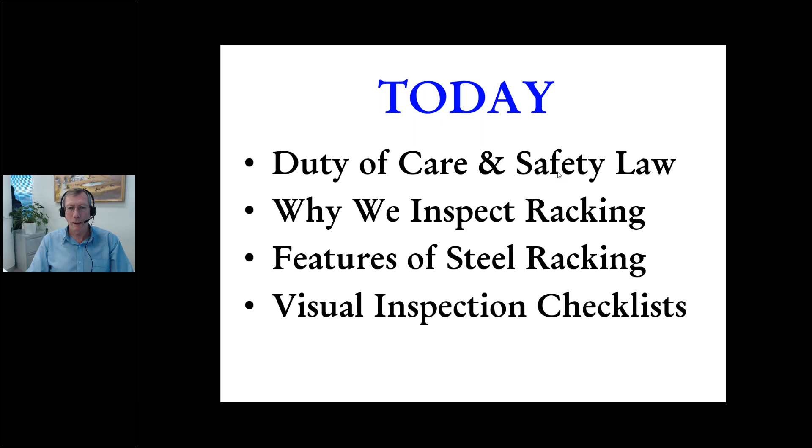So let's look at the general duty of care. If you work in the safety area, you'd all be very familiar with the 4 key points of the employer's general duty of care: 1, to provide a safe workplace; safe tools and equipment; safe systems of work; and that workers are trained and supervised. So where does safe racking fit into this? Primarily number 2, that there are safe tools and equipment. So part of the equipment and plant in the workplace includes the racking that you have.

If there's a problem with the racking, for example, if items were to fall off the racking or the racking were to collapse, that might affect number 1, and therefore it's not a safe workplace. We need a system of work for inspections, that's part 3. And we need to train people so they can actually do these rack inspections effectively and efficiently. So I'm going to take you through these parts.

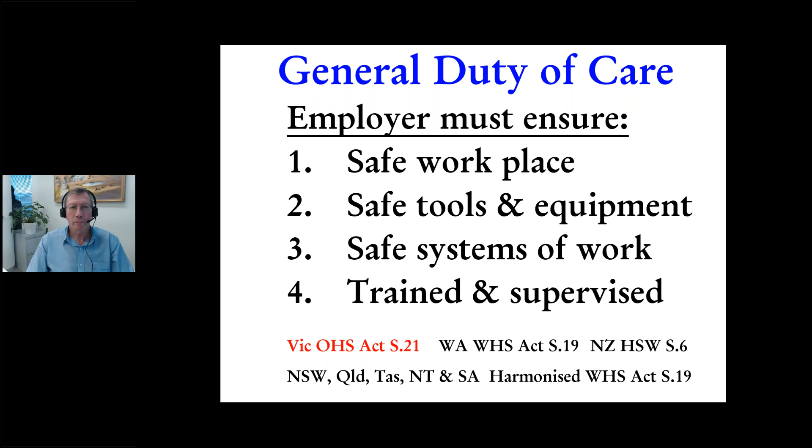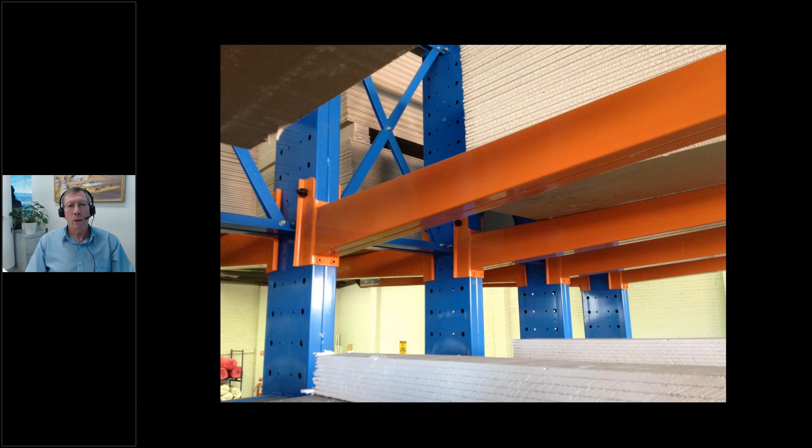So why do we need to inspect racking? Let's just have a look at some recent incidents and issues with racking. If you look a little bit closer at this scene, you're looking at some new cantilever racking that's only just been installed at one of our clients. And by first appearance, this looks high quality, very new, very good condition. But as we zoom in with the camera, you might observe something that's not quite right. And you might just see a hairline crack. I've now got the arrow showing you the crack that's appeared here.

And if we look even closer, you can see that that crack has extended up and over the top of that cantilever arm. What we found in this particular case is that multiple arms out of the same batch were affected. So our client had received a faulty batch of brand new racking. So there's an interesting point here that you can't assume just because you've got new racking that it will be safe and free of faults.

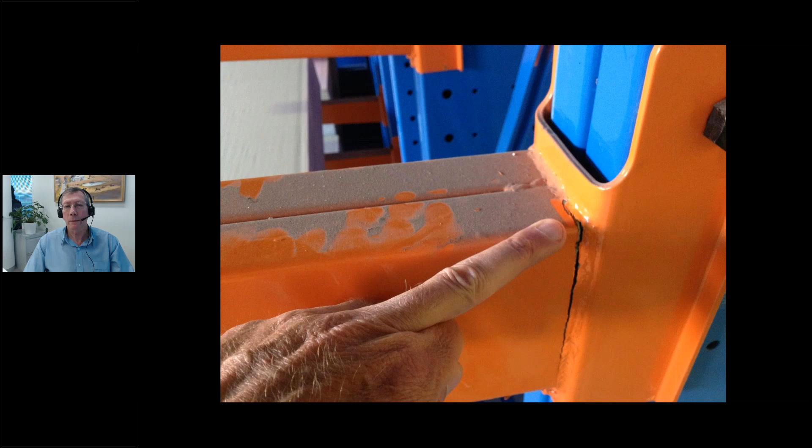Clearly the manufacturer was advised of this. We determined that the welds were not full depth. This was a manufacturing fault. So the steel itself was satisfactory metallurgically, but the welding technique was substandard for this particular batch. And the client received a totally new batch of racking, which in fact met the correct standard. So just something interesting to watch.

What you're looking at now is a collapse from some years ago now. This is the compound area of a manufacturing business in Port Melbourne, back in 2010. And this is the aftermath of a collapse of a section of racking. And you'll notice there's not much storage actually in this section of racking at the moment. But the first thing to understand is that it collapsed with essentially only one pallet load on the rack section that collapsed. So in fact, the racking was not fully loaded, and I'll explain the reasons why this occurs shortly.

Here are some details of the carnage from this particular rack collapse, and you can see how extensive the damage to the steel columns and beams was in this case. And we were very fortunate with the company involved that no one was in the immediate area. The forklift driver was within the safety cage of the forklift and didn't sustain any injury. So this was a very fortunate learning experience. So let's continue the learning experience to actually understand a little bit more of what happened here.

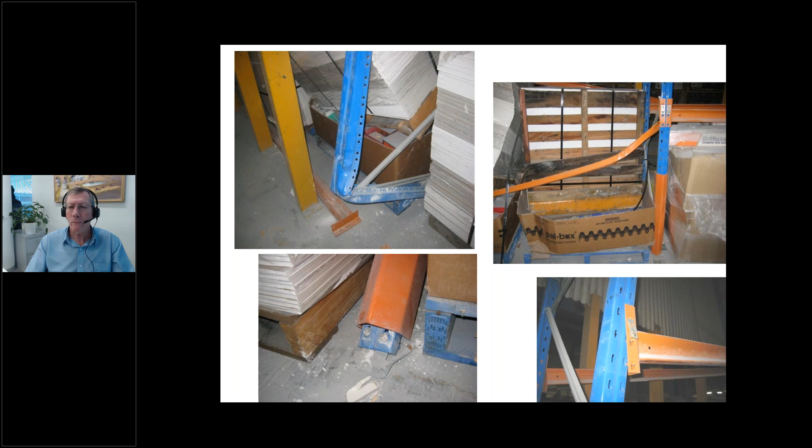Interestingly, this is one of the few cases in my work experience and long experience as a safety engineer where we've been able to look at the photographs both before the collapse and after the collapse. So here we are on the 11th of August, 5 days before the collapse, and you'll notice the arrow on the left pointing to a slight bow in the vertical column. The blue vertical column there is only just slightly bowed. If I didn't have that arrow there, you might not have noticed it.

The photograph on the right shows a slight flattening of that blue vertical column in the middle. So it had been bumped probably by a forklift placing a load into the racks sometime previously. And the reason the racks in this area are empty is because that bow and damage to the rack was correctly observed by the local team, and correctly they followed the procedure to unload the racks on each side of any damaged section. So this is the correct practice in good best practice racking and logistics businesses. So they've followed the correct procedure here.

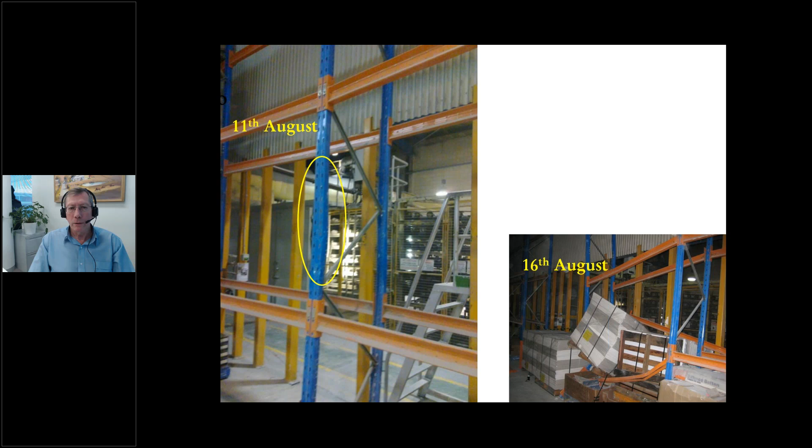So here's the scene on the left on the 11th of August, and here's the arrow showing going through 5 days later. So what actually happened? They unloaded the racking, as I explained to you, which was the correct process in this area. What they failed to do was to immediately tag out the racking so that anybody else coming onto shift or on a different day will not miss the damaged section of racking and start loading the racking up, which is exactly what happened 5 days later on a night shift.

So with poorer lighting at night, the forklift driver looking for somewhere to place a load came across an empty section of racking and thought he was very lucky. He's found some gaps in the racking that he can place his load, and he only placed one of those loads onto the rack to see the damage that you see here.

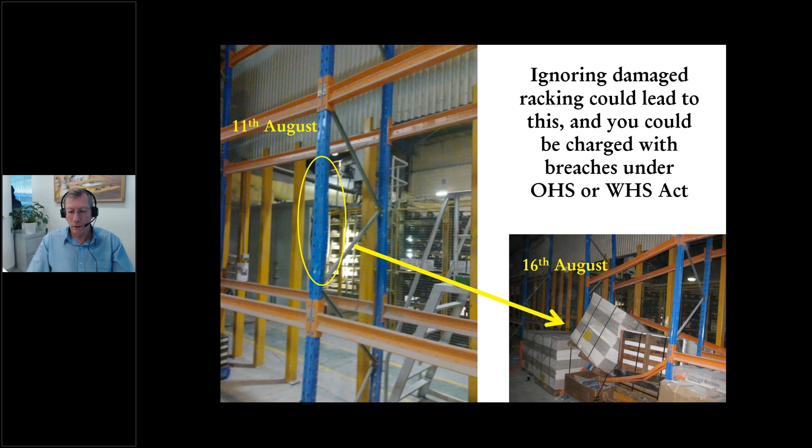So the lesson from this is not only do you need to do inspections, you need to be equipped, you need the danger signs, the danger tape, and possibly witches' hats to immediately tag any unsafe racking out of service immediately. And this needs to be an important part of your procedures. And we'll come back to the procedures shortly.

So I mentioned earlier, what are the features of thin-walled steel racking and why do they behave the way that they do? I'm going to carry out a demonstration for you here, and I'll pull back a little bit from the camera, and I want to use a 1 meter measure here, which is a typical spirit level that we might use on a construction site, and we often use these during inspections of racking as well. So you might want to go to one of the hardware stores and buy a 1 meter spirit level with a tape measure you'll see on one side of it. I'm using it for a different purpose here though. I want to just show you what is different about thin-walled steel racking.

So if I come back here, let's assume this is the vertical column, and now we have the beams coming out of each side of the steel columns. And let's say typically we have 2 pallet loads on each side of a beam that would normally be much longer. Let's assume each pallet load is a ton for simplicity. So if I have a ton here and a ton here, I now have another column out this side. So 1 ton carries over to this section of the column. And if I have another load of a ton here, that brings a ton load down to this section of the column.

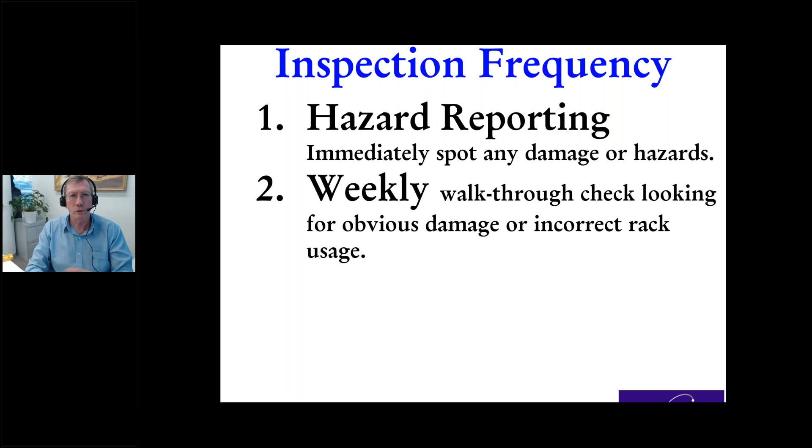Next level, I think a weekly walkthrough check, looking for obvious damage and incorrect rack usage. And I'll show you what incorrect rack usage is when we go through the checklist I'll share with you in a moment. On a monthly basis, we believe there should be a formal rack inspection using a checklist. And the people who use this checklist will also need some training along the lines of what we're covering today to be able to do this.

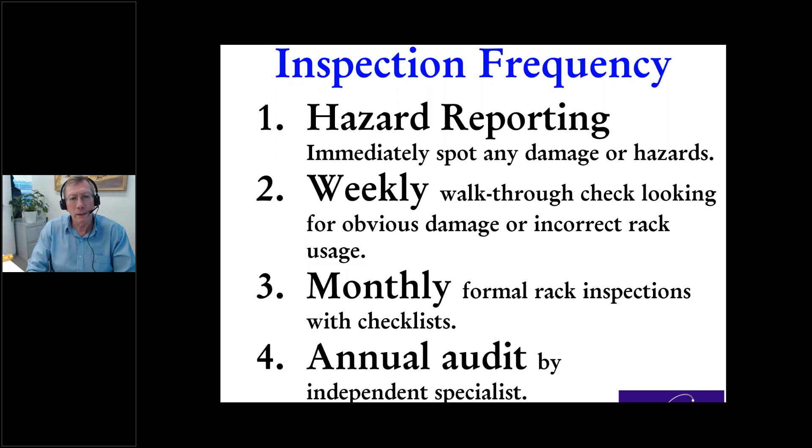And finally, there should be an annual audit by an independent specialist. This could be your rack supplier or a qualified engineer who comes and does an independent review on an annual basis to sign off, and that's in accordance with the Australian standard for steel racking that you'll have this annual audit.

So there's an example of a plaque where a firm has inspected the racking and indicating 1 year, 12 months, hence, it's due for its next independent inspection.

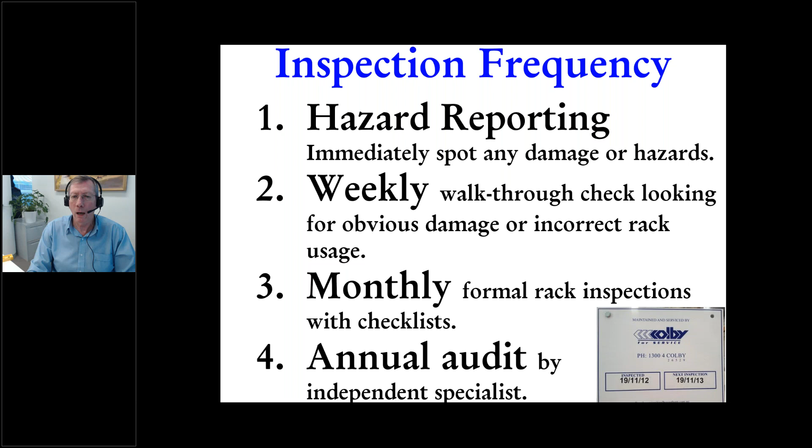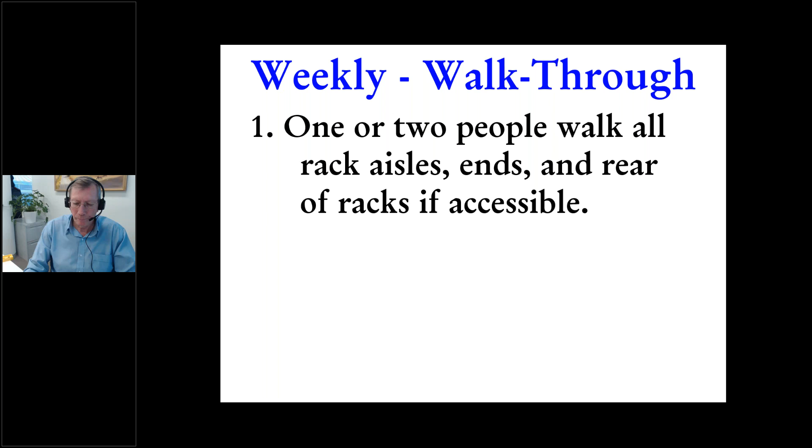So let's look at the weekly walkthrough. One or two people could walk down all of the rack aisles, look at each of the ends and the rear of the racks where they're accessible. What they're looking for is out of alignment. You can look down the line of the racking and it should all be perfectly in line, perfectly vertical, and the horizontal beams perfectly horizontal.

We're looking for obvious deformation or damage. So we don't need a ruler here, we don't need a spirit level. What we're looking for is what the eye can see. So this is the weekly walkthrough. It's a quicker, easier type of inspection. We're looking for missing safety clips, I'll show you a visual of what they look like shortly, and incorrect storage practices.

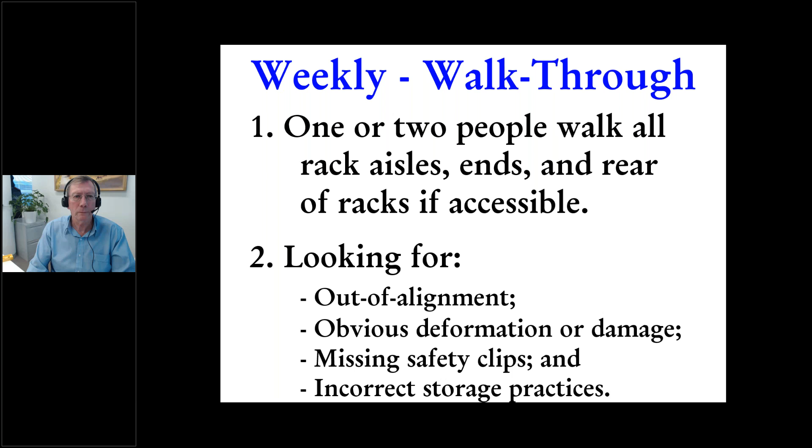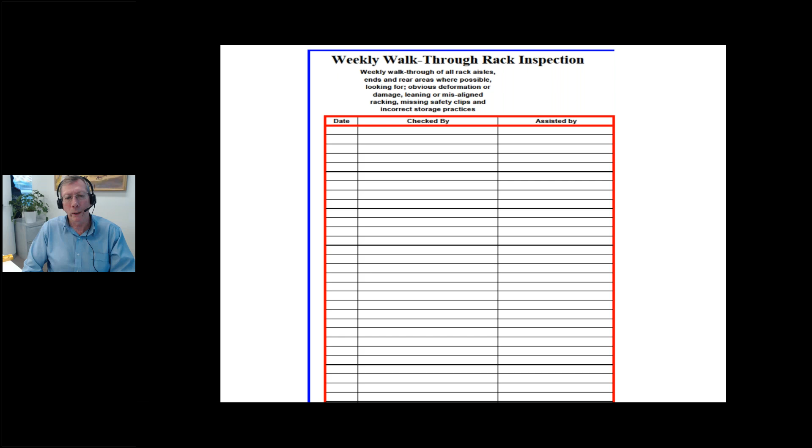So a sign-off could look something like the date that it was done, who was the individual or persons who did the walkthrough check, and if they were assisted by somebody. So you would only have one of these per week. So in fact, this sheet may cover many months of inspections to just show that we have a history of looking at our racking formally at least weekly, but in fact, it's a fairly quick check that we're doing here.

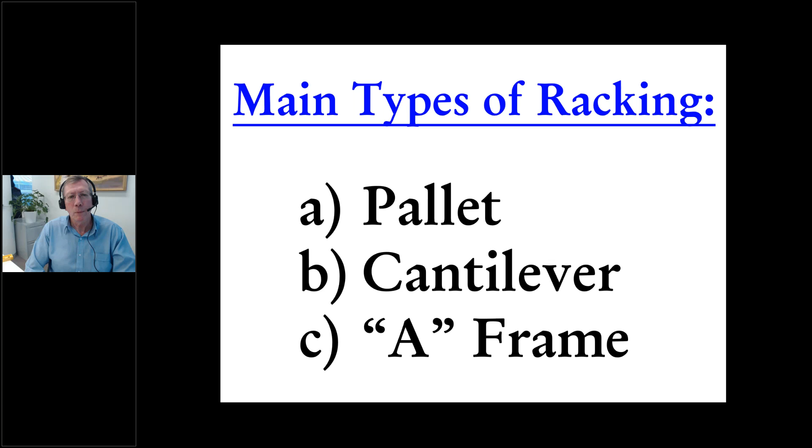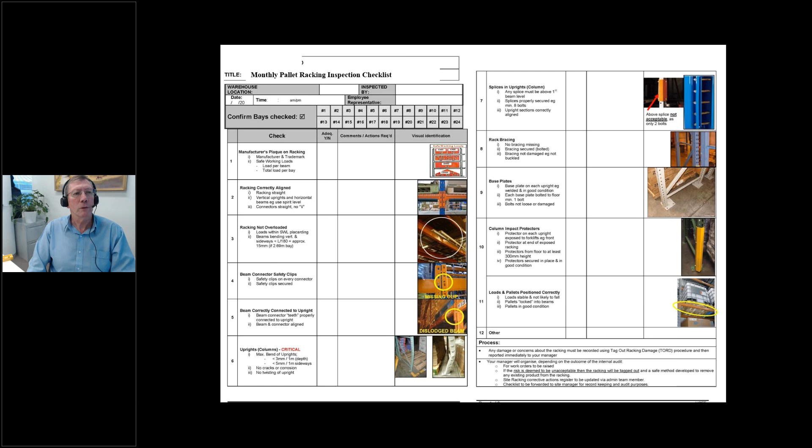So we'll go item number 1, the manufacturer's plaque to be displayed on each set of racking. So the Australian standard requires that a plaque like this be displayed showing the safe load limits for each level, shows who was the manufacturer, the date it was installed, and any other features of the racking or safety rules.

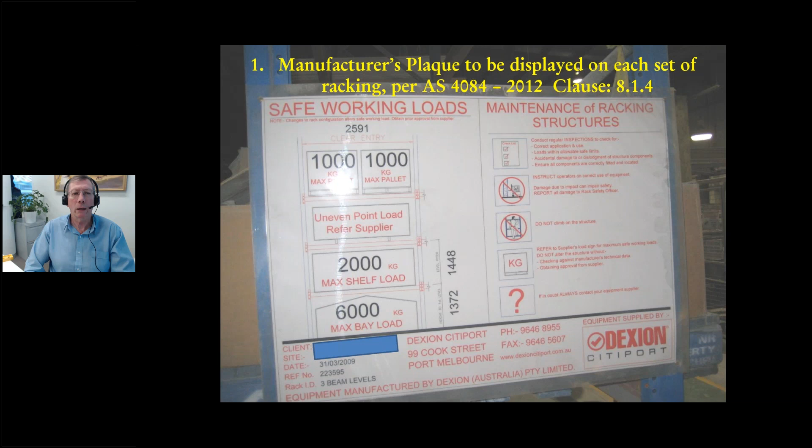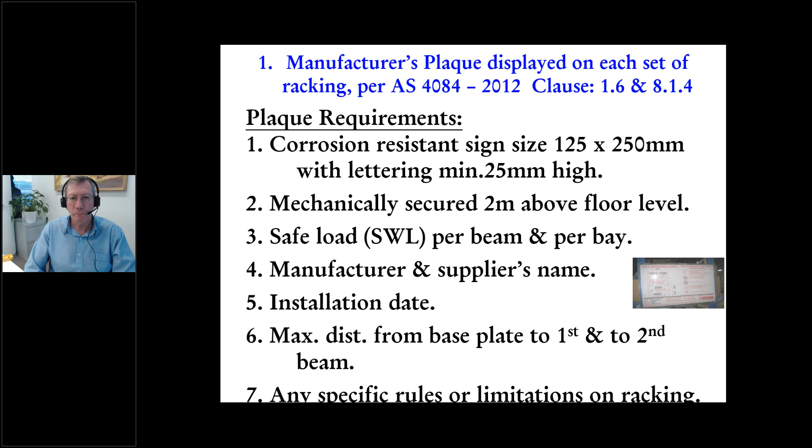In addition, the sign is to be corrosion resistant, lettering of a certain height, mechanically secured about 2 meters above floor level, i.e. about eye height, the manufacturer's name, installation date, the maximum distance from the base plate to the first and second beam, and any specific rules. So the plaque note, drawings of as-built racking must also be provided by the supplier with any specific limitations or different configurations allowable as shown on the plans. I'll show you a set of those shortly.

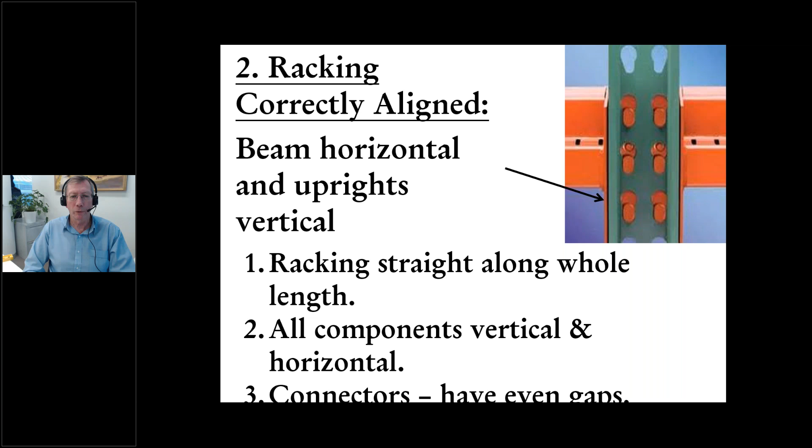So let's have a look at number 2. Is the racking correctly aligned? If we look behind the beam, you'll see the gap here on the slide is very equal between the column and the beam. So this tells me that this is correctly aligned. If you've got the spirit level, as I've explained earlier, you can place this on the beam, you can place it on the column as well. So we want all components vertical and horizontal. We want connectors to have even gaps. We don't want to overload any of the beams.

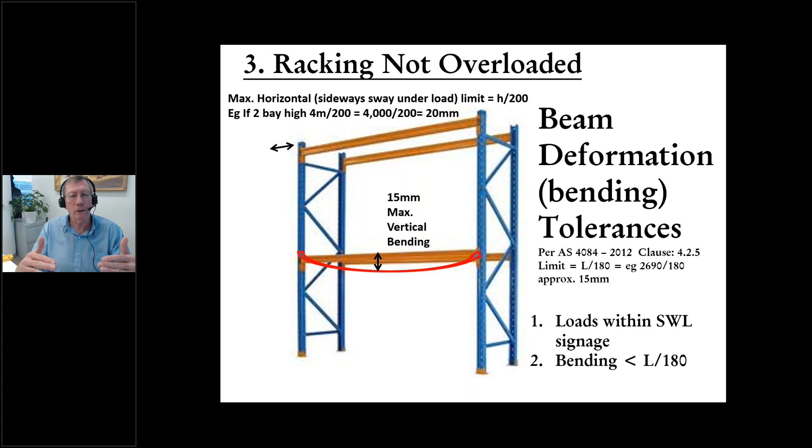So the Australian standard indicates that the maximum bending tolerance of a beam is to be the length divided by 180. So this is a straight, easy calculation. So most normal pallet racking will be something like 2.69 meters long. Divide that by 180 and it gives you 15. That means the maximum bow that would be allowable, so if I put a straight edge on that, would be 15 millimeters at the middle. So there's a little bit of bowing allowed under load, but when you take the load off, that should spring back to horizontal. So we shouldn't have permanent deformation.

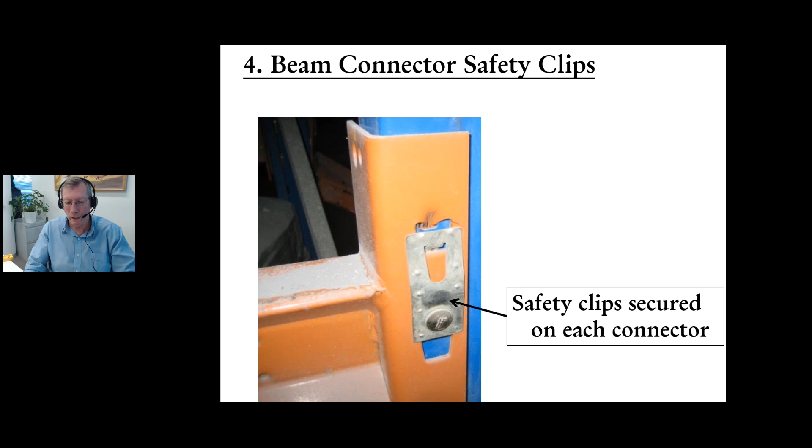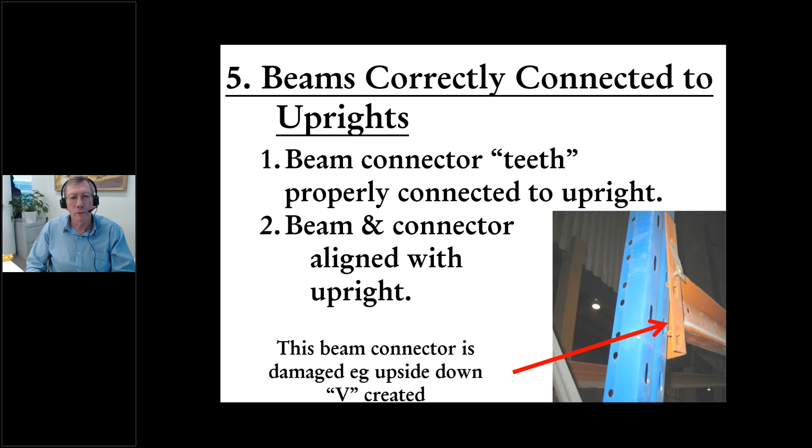So they need to be correctly connected to the uprights, and you'll see in this photograph that there are little teeth on the connector from the beam that go into the holes in the columns of the racking.

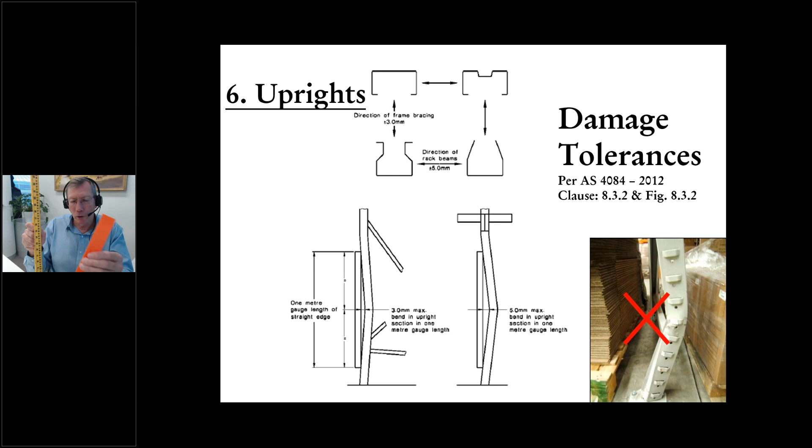What I can share with you is that if you can see a bow or a bend in a vertical column of a steel racking with your eye, then it exceeds those tolerances. 3 millimeters is incredibly small over a 1 meter gauge length to detect a 3 millimeter bow. So a visual inspection can very quickly tell you whether this meets the standard or not. It just so happens having the 1 meter spirit level ruler and a tape measure, you can confirm what the dimensions are for your particular piece of racking.

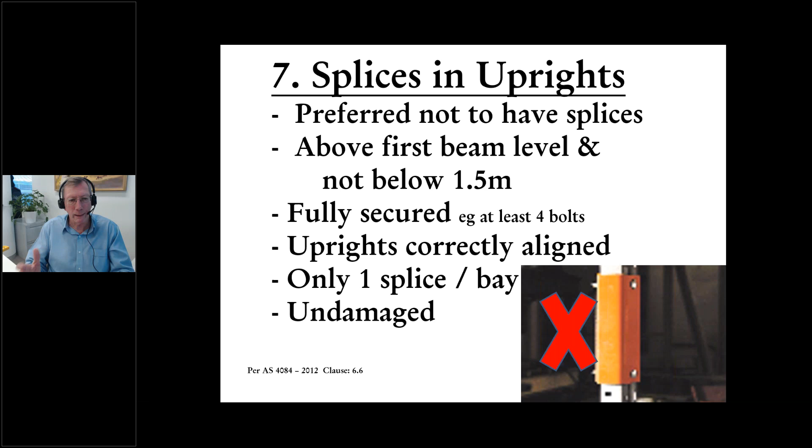If we are going to have splices, they must be above the first beam and not below 1.5 meters. They must be fully secured. That would be at least 4 bolts, but there could be a lot more. The uprights need to be correctly aligned and not slightly offline, and only 1 splice per bay and obviously undamaged.

The bracing has a higher tolerance than the columns, up to 10 millimeters over a 1 meter stretch, so we can have a 10 millimeter bend, but no more.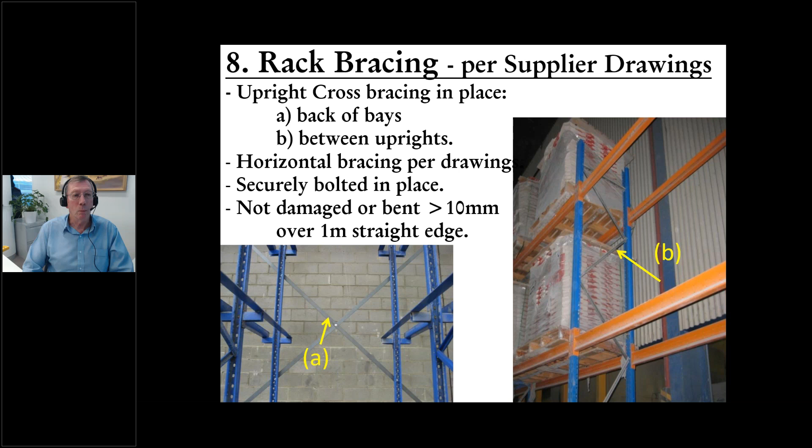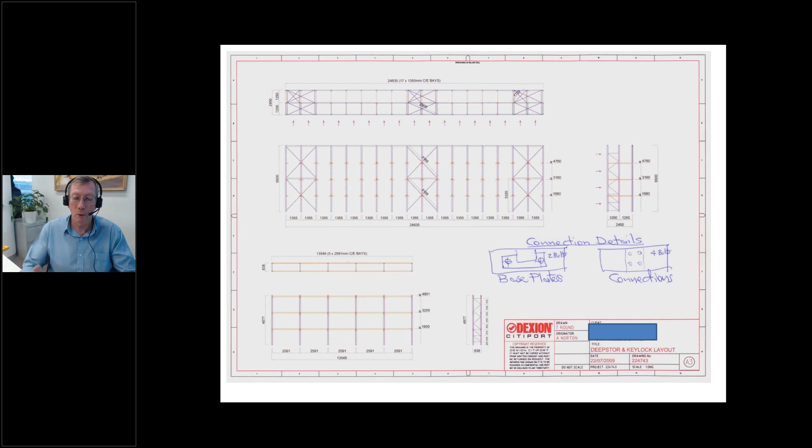Here is an example of the manufacturer's as-built drawings, showing you how many bays, how many levels, and where the bracing is, and how much bracing. And I've added here in hand-drawn, in this case, the base plates, and I'll come to base plates in a moment. The reason for this is the Australian standard has been updated more recently since this drawing, and now gives specifications for 2 bolts per base plate, and I'll come to that.

So every base plate should have at least 2 bolts. Most base plates have 4 holes in them, and a lot of people think, do I have to put a bolt in all 4 holes? The Australian standard is quite clear, at least 2 bolts per base plate for each column. They're to be secured and not sheared off or bent.

The base plate is to be flat on the floor. The base plate weld is not to be cracked. And if there's packing under the base plates to keep the racking on a spirit level, horizontal and vertical, you cannot use timber because that'll rot away. It needs to be steel or concrete.

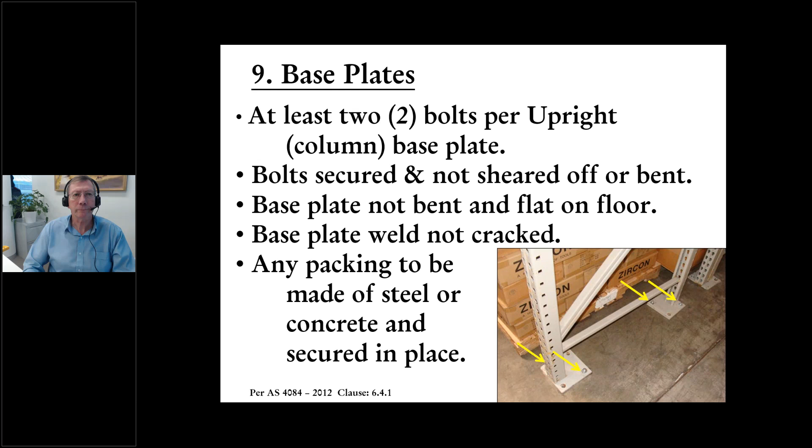So a column protector doesn't have to be set into concrete in front of it as a crash protector. If we look at this column and I touch it, it bends in the middle very easily. If I actually connect this not into the ground, but to the vertical column, I've now got a more rigid protector, which is another ruler in this case, and now as I try and poke the column, you'll see it won't easily bend.

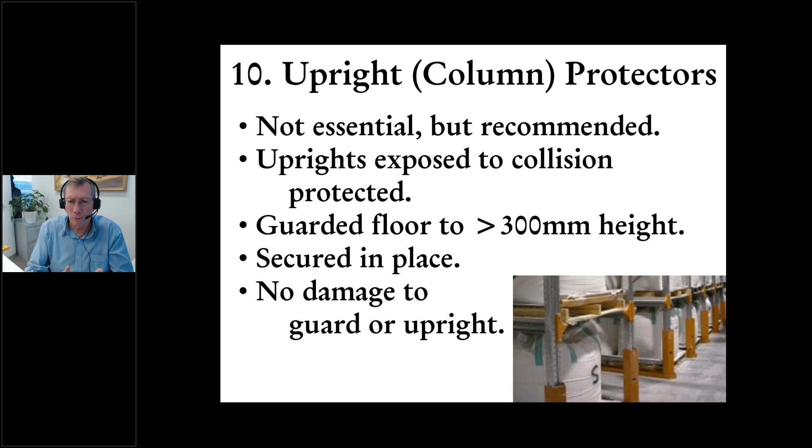So all it's doing is adding some rigidity to the vertical column. It is not actually setting it into concrete in the ground, preventing a forklift from striking it and shearing it off. If a heavy vehicle like a forklift strikes a column of a piece of racking at high speed, then no protector will stop the rack from being collapsed. So we still have to have drivers operating sensibly within our rules and obviously trained and disciplined to operate correctly.

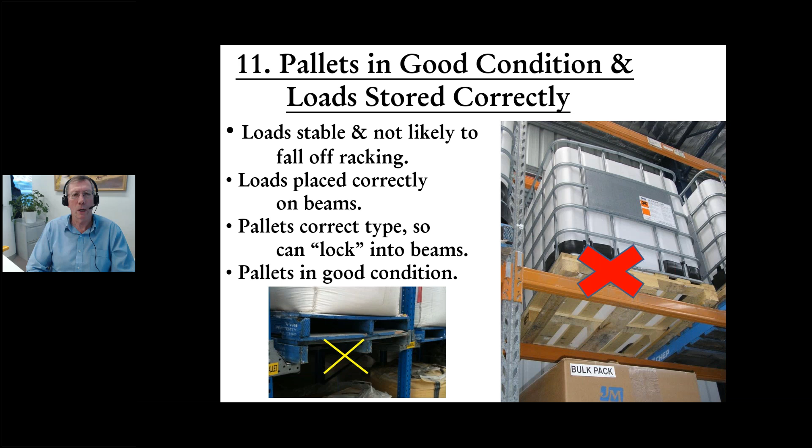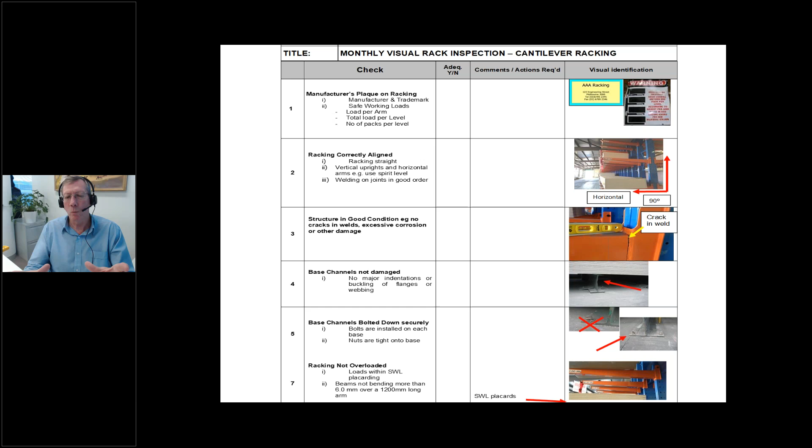The base channels are not damaged, and you'll see in the photograph here, there's a bow in the base channel. Although as bad as that bow looks, we can do a structural inspection and probably determine that that could be reasonably straightened without being fully replaced. We still need the base channels bolted down securely with the bolts, the racking not overloaded, so we'll have the safe working load placarded either on each of the arms or on the placard at the end of the cantilever pallet racking, to show what the load is for each arm in that set of racks.

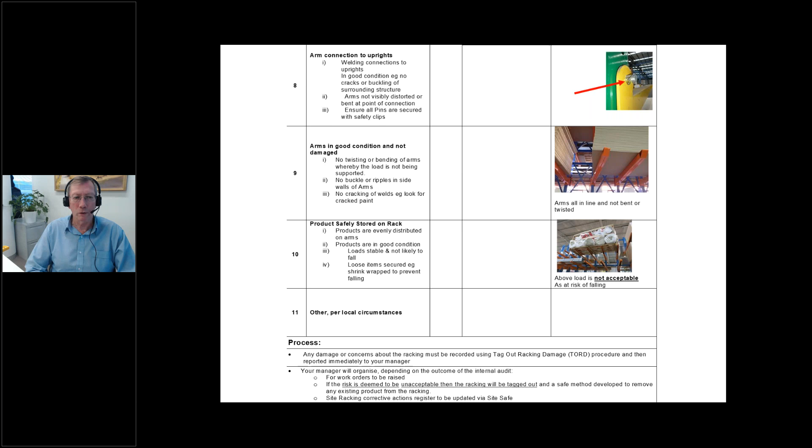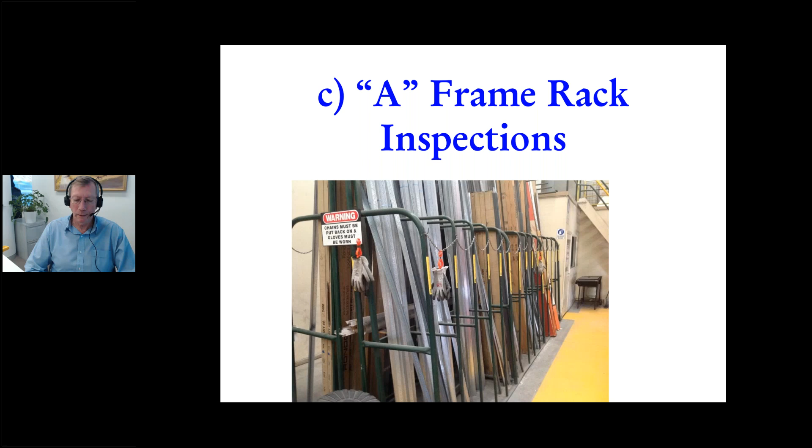So let's look at A-frame rack inspections. So here you're looking at a typical A-frame against a wall, which is storing long sections typically, and in a vertical form. So one, structurally sound, no excessive corrosion, no cracked welds or bent components, not liable to tip over, e.g. bolted to the wall or floor, and chains to hold the material into the racks so that they won't fall out.

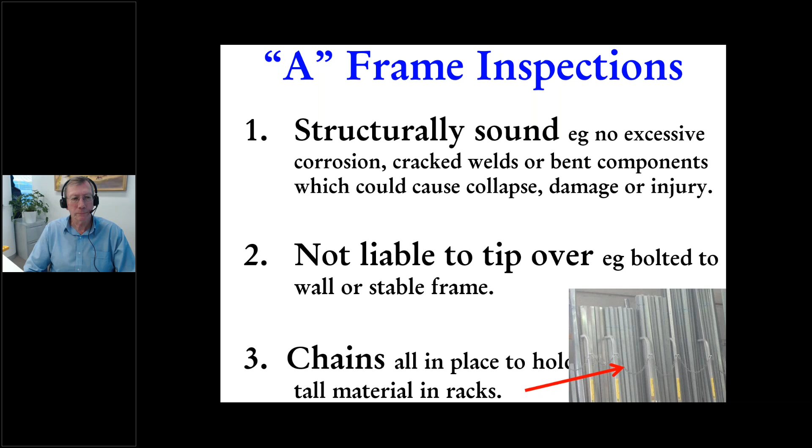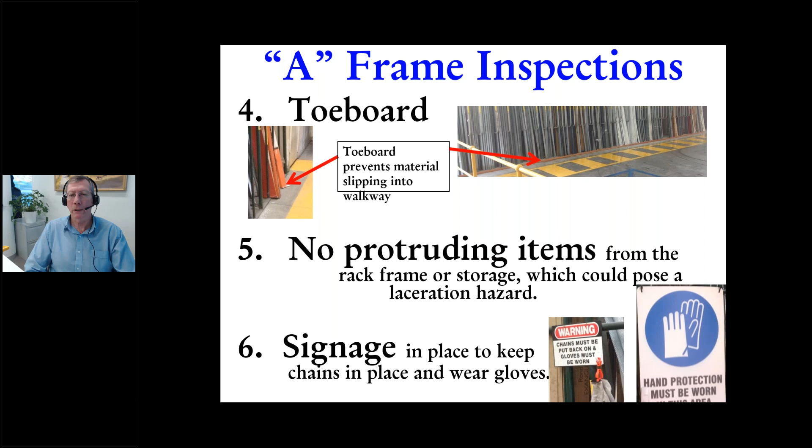Thank you very much for attending. I hope you learned something about the importance of doing rack inspections and also picked up some tips to do your rack inspections better.